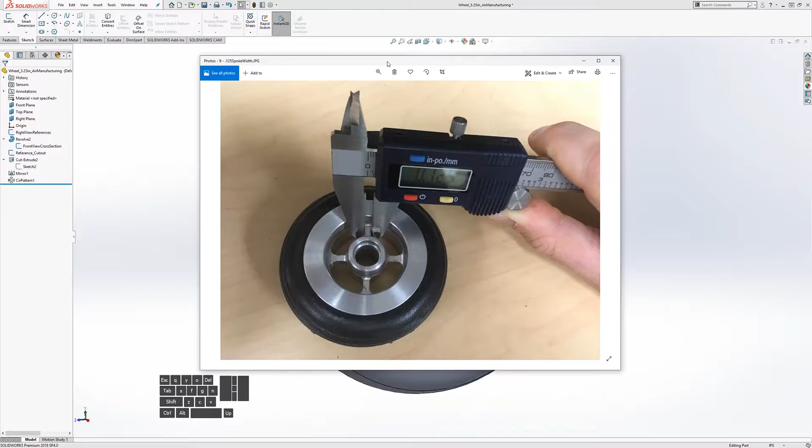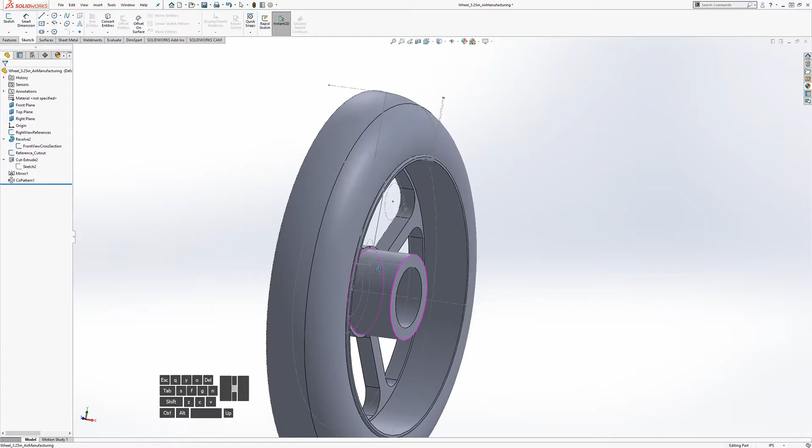So we can see that we are missing maybe some fillets. They're not there. We did this fillet in the sketch because it actually locates some of where our tire ends.

So we did that in the sketch, but the other fillets we can do as features, which is pretty clean. There's definitely one on the outside of the hub, as well as the inside, and they're probably actually chamfers. When a corner of a cross section is a male corner, it's usually chamfered, and the female ones are usually filleted. Like this one is probably filleted, this one's probably chamfered.

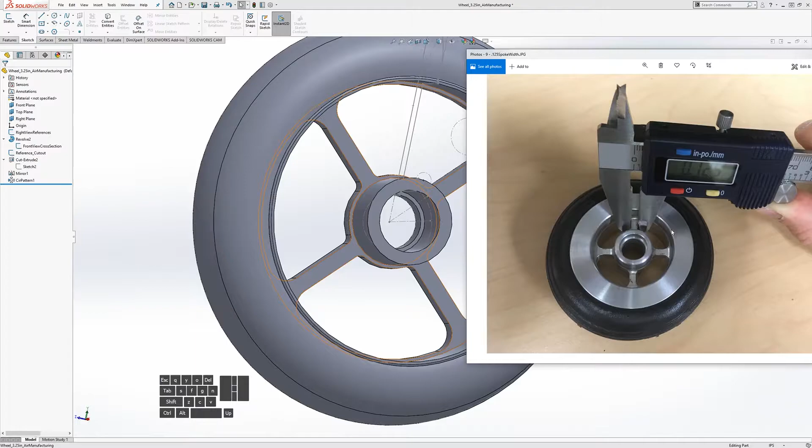So let's go ahead and do that. This guy is a male corner, so we're going to go into the features, and we can chamfer that edge. That is way too big.

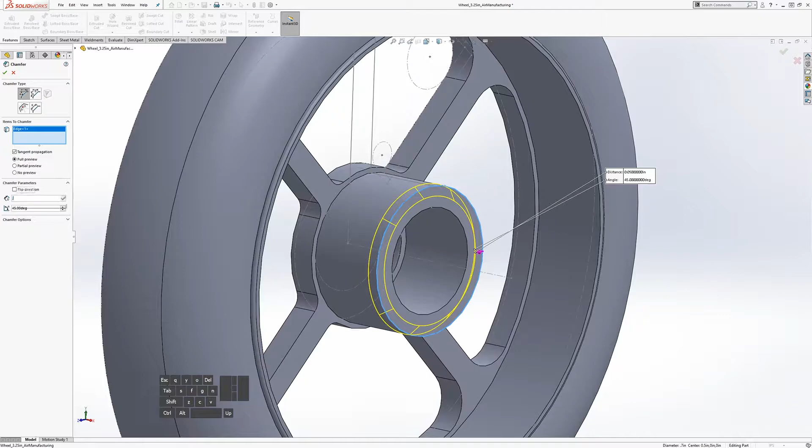That is way too big. Let's try 0.05 inches. That looks a little big too. In our preview, maybe 0.025. That looks good.

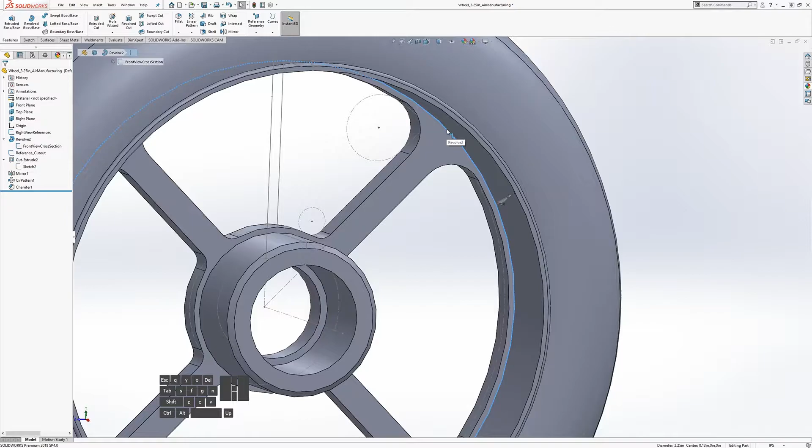And so if we go back and do this now, so a machinist can go in here with a round-ended mill bit and just going around in a circle, and that will end up filleting this with an actual circular fillet. Instead of here, a round bit can't accomplish a male fillet. So often the male ones are chamfered.

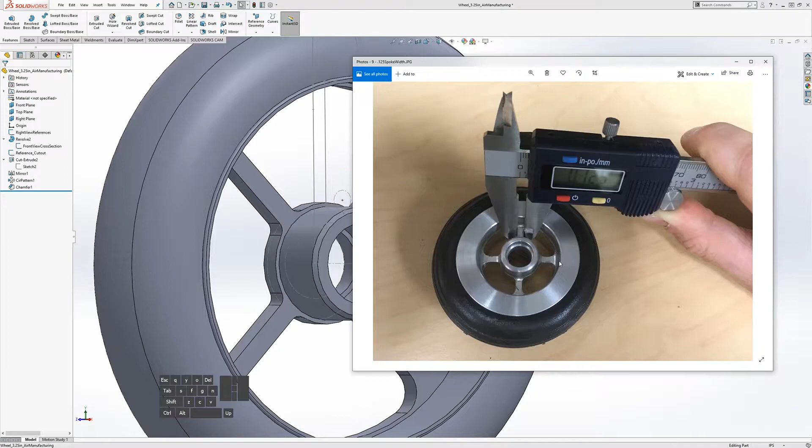So, but yeah, if we go back and look at our part here, it definitely is filleted a bit in there. So let's go ahead and fillet this guy, and that is going to be big.

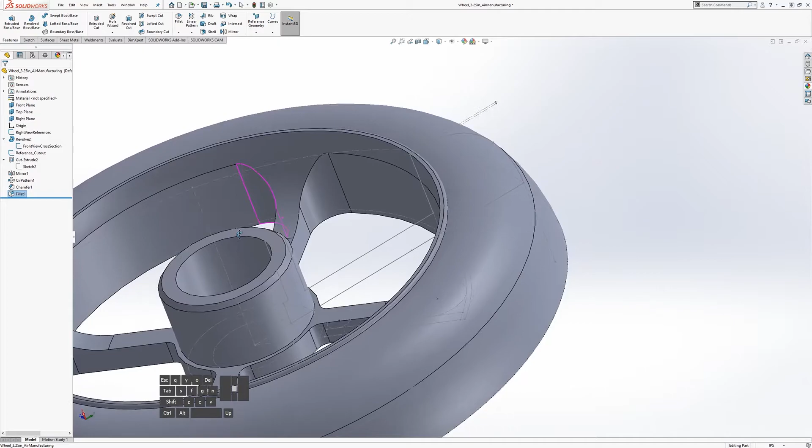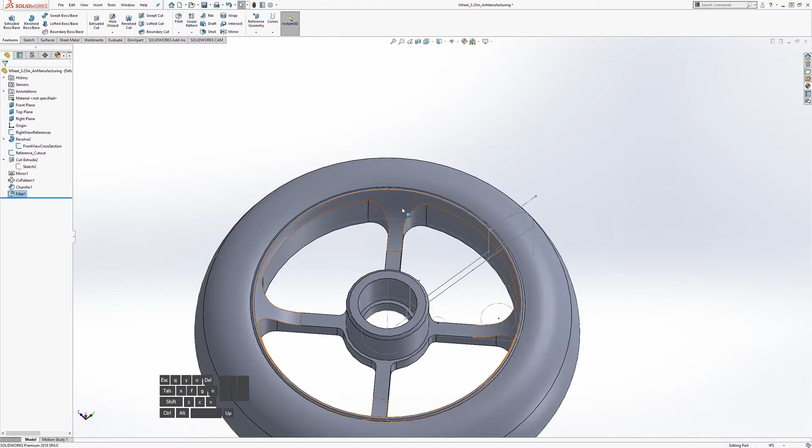So you can see if we go with that, that is a manufacturable layout here, because the operation could be with a round-nosed mill bit to go around this circle and create that fillet, and then come in with a bit that can do a through cut and go all the way through, and a circular bit obviously would do these cutouts, and you would still have this fillet at the end, but it's not that big, so we can go and edit that feature.

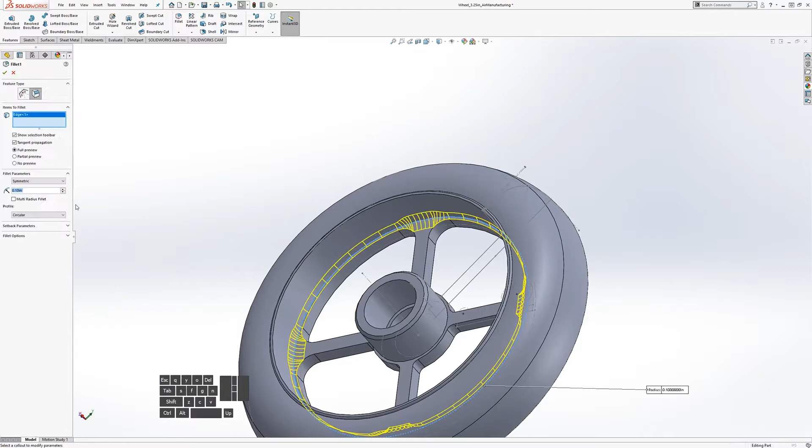Let's try 0.1 inches. Not sure. Let's check out a picture again. Probably smaller than that. So 0.05 inches. And that looks pretty good. So definitely that one.

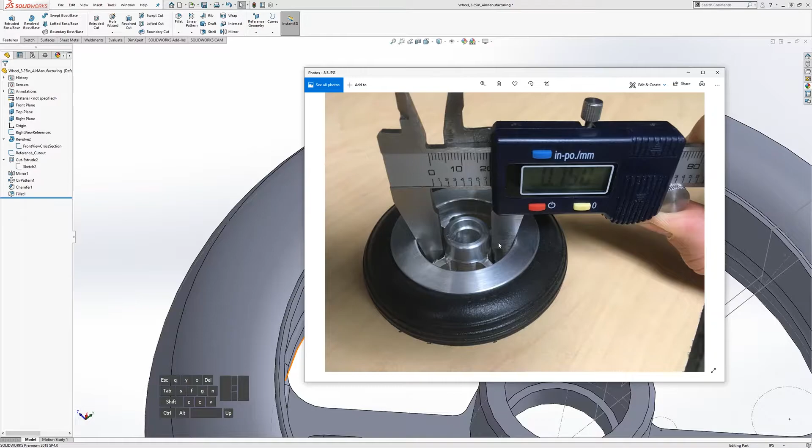What about the inside here? That's a male one. It's probably chamfered. Go back in here. Yeah, I would do a chamfer there.

So let's just remember how big this is. We can link all these, but there's only 2 of them, so I'll just remember it's 0.025.

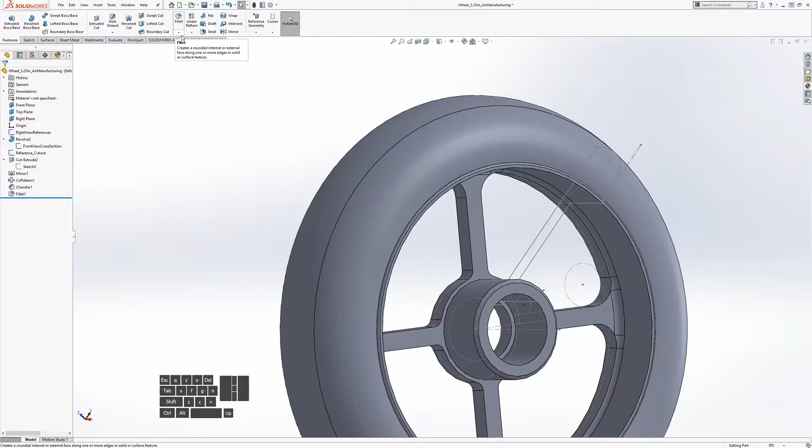Let's go into our chamfer here. See what that does. Does that look right? Kind of a bit aggressive.

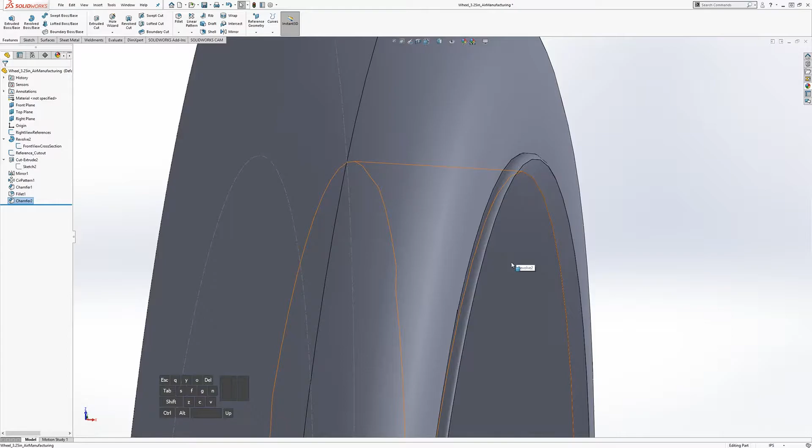It cuts into the bead of the tire, sort of. That one. Oh yeah, that's not the one I should be chamfering. It's the inner one, so I can actually change the edge here.

Oh, and yeah, I'm missing the... Okay, I cut too far. I made the cutout too far here. I'm missing the actual wall of the rim here.

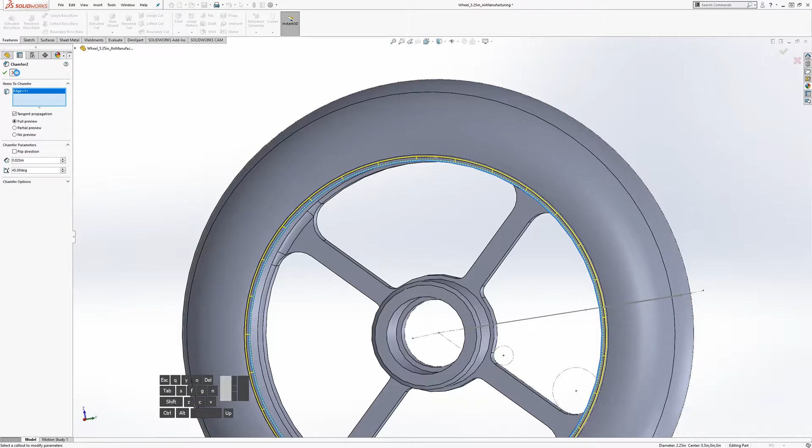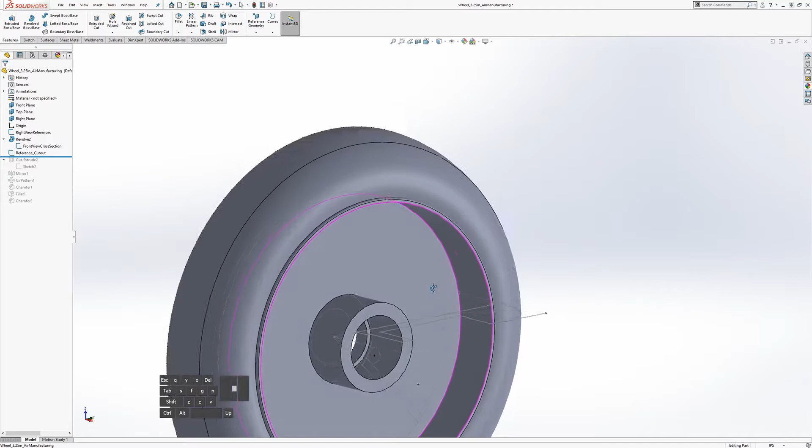So let's go back to our reference cutout here. That cut too much. If I roll the part back to this point, now I can see that actually I'm missing the wall of the rim here.

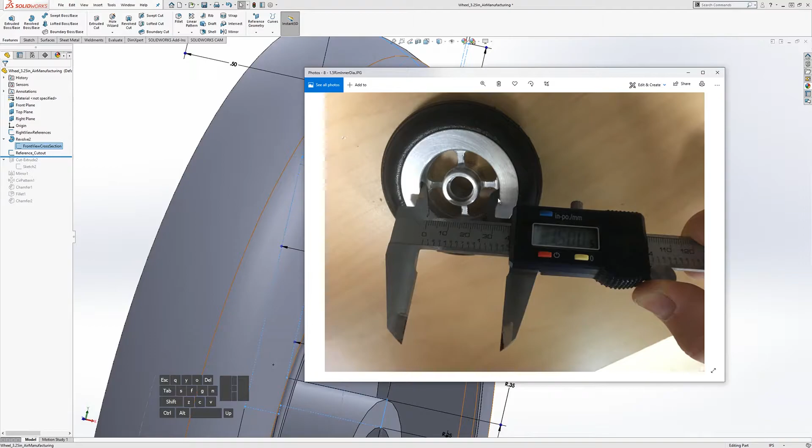So let's go see what we did here. So we're missing, so 1.5 inches. That is the inner radius of, well, inner diameter of the rim. So let's roll it back one more.

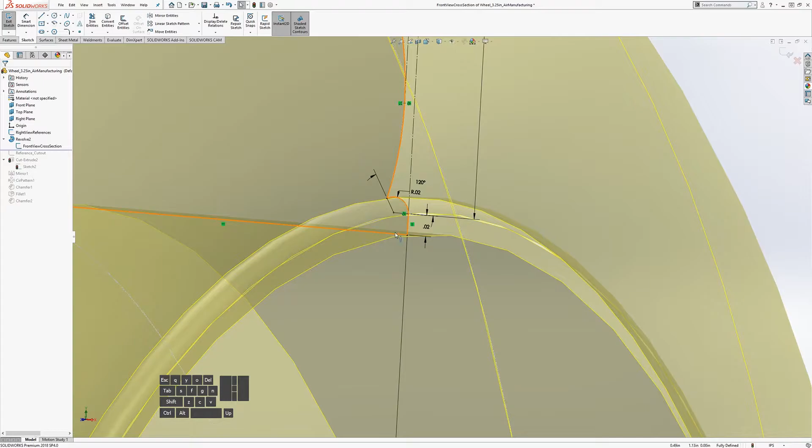Get into this sketch. So we need this to continue until, so we actually need this. Yeah, let's delete this guy. No.

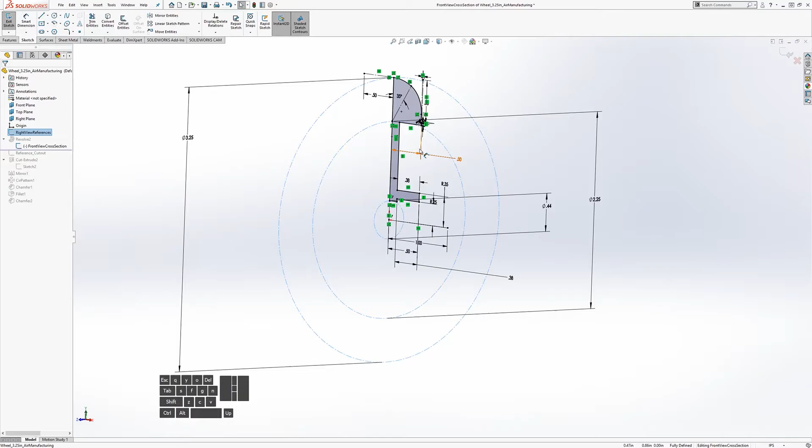That is, let's go back and remember what this is. 2.25, oh yes, that's the outer diameter of the rim. So we need an inner diameter of the rim also. It's at 1.5 inches. So we need to edit this.

This here is going to be the outer reference. So let's just turn that into construction. This into construction.

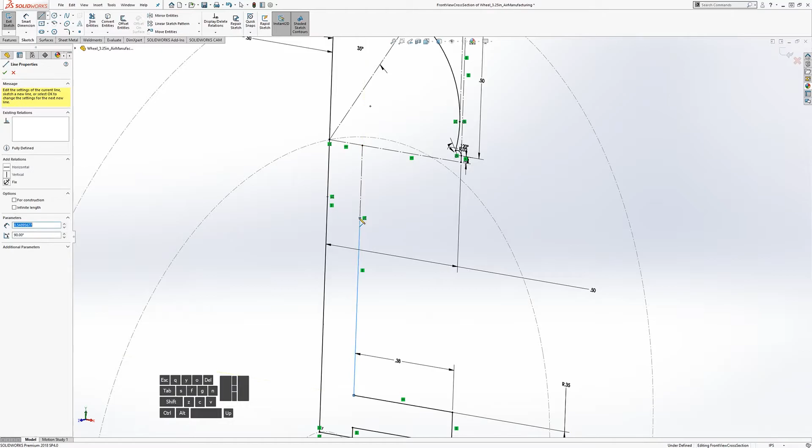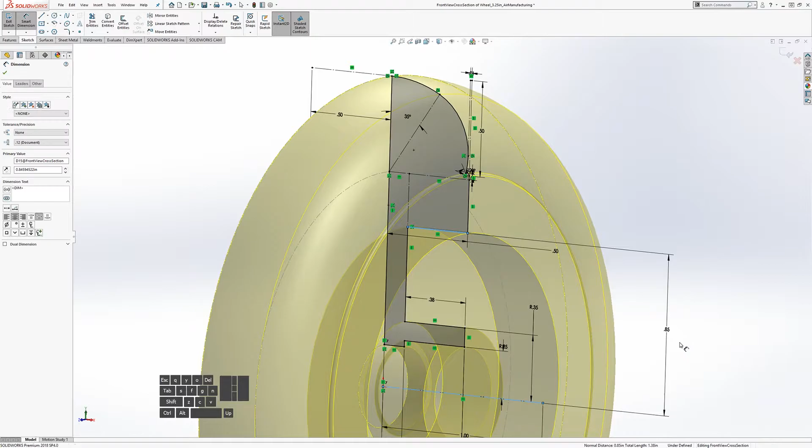So I probably wouldn't have cut it exactly that way, but looking back, to fix it that looks better. So we can now get this guy 1.5 over 2 inches. And that looks more like it.

Now we actually have a wall of the rim there. Don't know how I missed that before. But that's good. So that's pretty common in CADing, that we're looking at the details and not the big picture. It's a good idea to check the big picture out once in a while too.

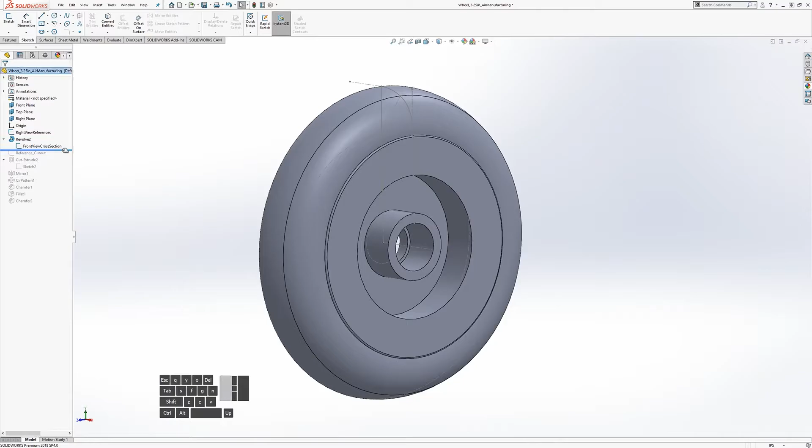This is also common here, that we need to go back and recreate some features here when they're probably going to break. So we want this to not be tangent to the rim here.

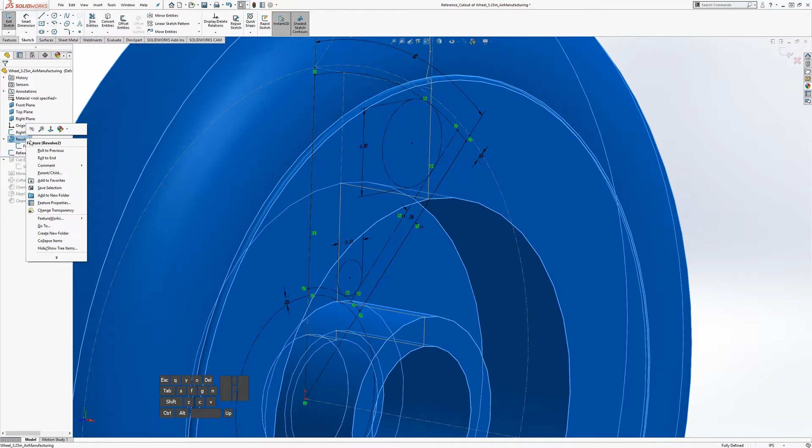Let's hide again the revolve. We want this cut to come down and be 0.025 from this one. So which of these? This one. Okay, I see it now.

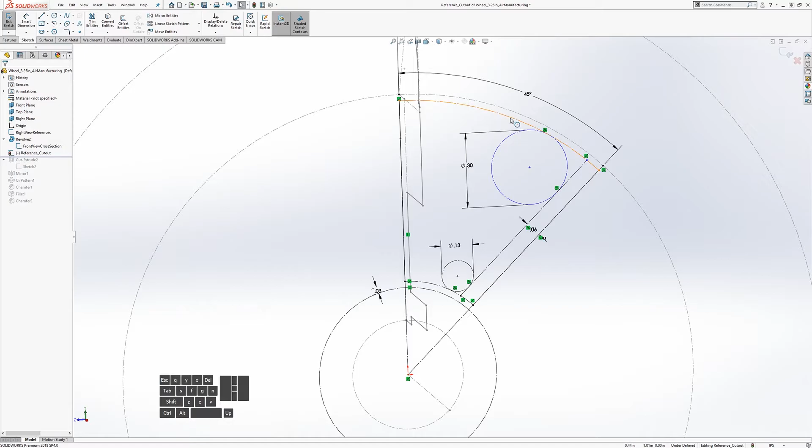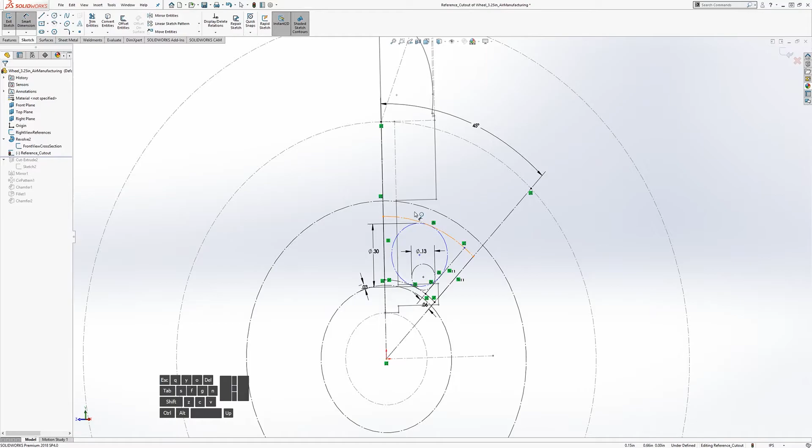So yeah, we can get rid of this. And instead, we want to be looking at, so we need a new reference in here. Let's go to here, construction, and we're going to take that measurement in here. This is 0.05 over 2 inches.

There we go. So now we have a better reference for our cutout, and these radii are probably a bigger estimate. If we go look back, they're not that big in that cutout.

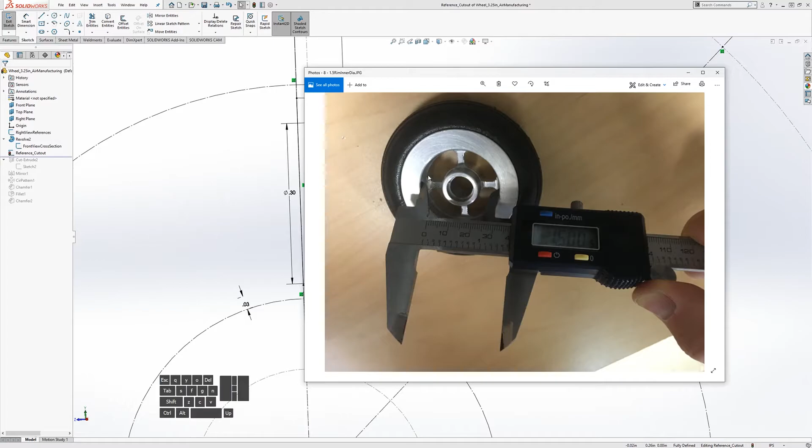So let's actually compare with a similar view here. Head on, I'll put it on this side of my screen, get this guy out, and yeah, they don't take up as much of the spoke. The spoke is straight for about half its length, maybe a third of its length is straight.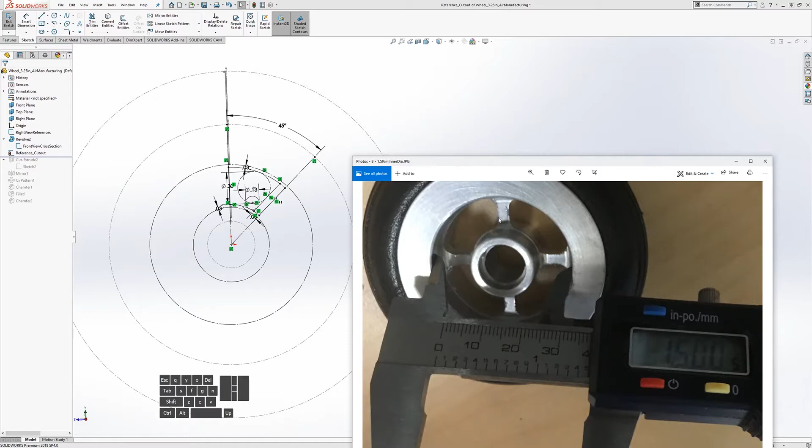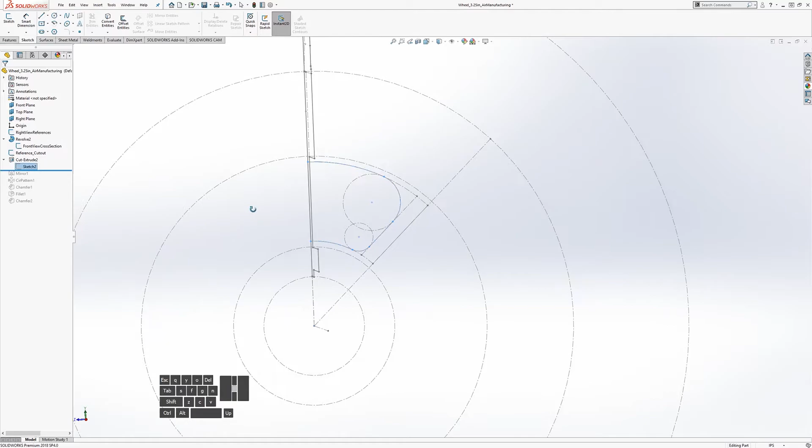So let's just make this a bit smaller, maybe a bit bigger than that. This one, well, let's try how that looks. So that cut extrude resolved well again. It updated with it.

Because all those references were referring to lines that when we just moved where they are. We didn't delete any or change their layout or anything.

So may as well call this cutout sketch.

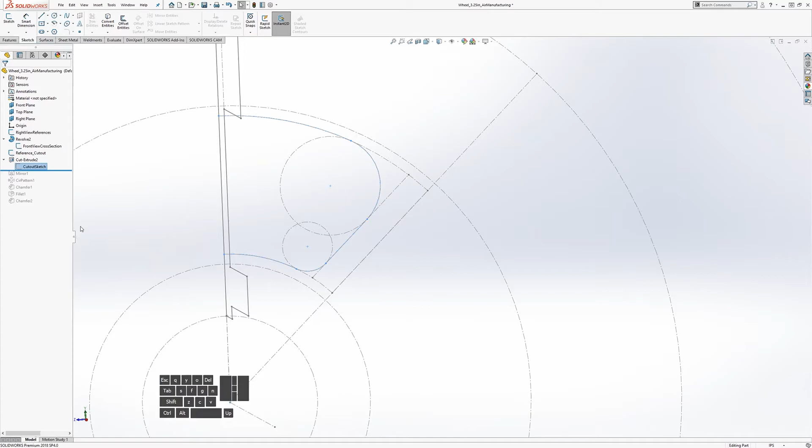And we should just view this now so we can see its progression. All right, so now we can go back down. Mirror looks good. Pattern looks good. And what about these guys now? Chamfer looks good.

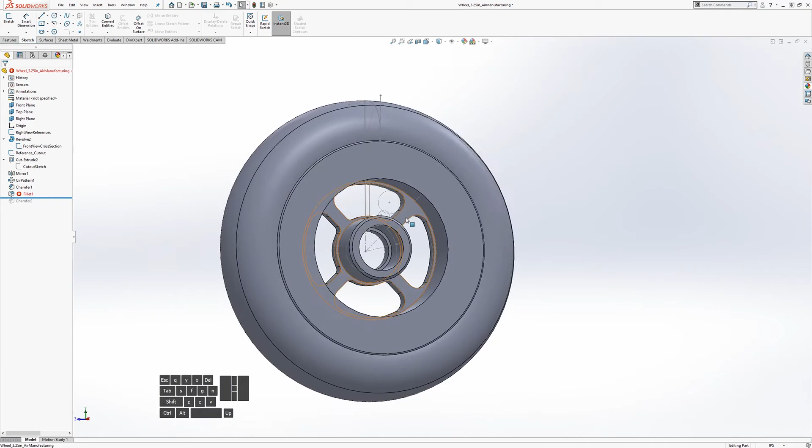Fillet broke. And that's because we did change where it used to be. It's on a new geometry here that did not exist before. So if we edit that, it's looking for a missing edge, which it's showing you where it used to be.

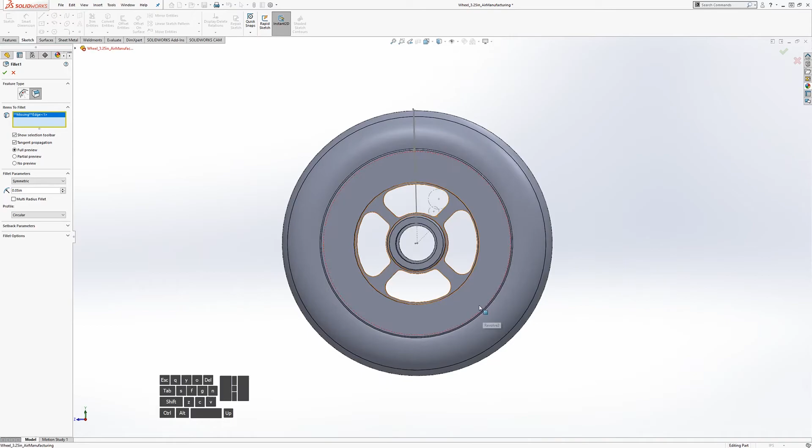It used to be there. This red line that we can no longer grab anything there. And it knew that it was on an edge that no longer exists. This face is now added. This edge is new. It wasn't there before.

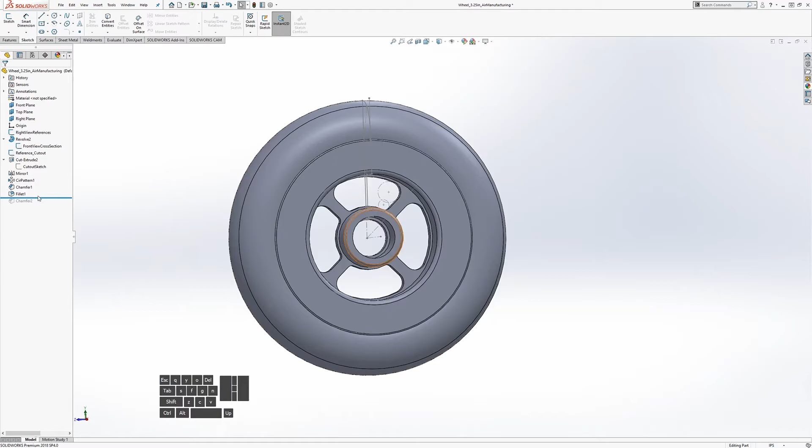So we can just select the old one, change it to the new one, and say OK, and then there it is. Let's just continue this tree. That chamfer broke. That was, where was that?

That was also there. Okay, so we actually need, I put it on the wrong one here. Let's rewind it a little bit.

The fillet was not there, or it was not intended to be there. It was intended to be here. Let's get rid of this. That's where the fillet is. Go back down.

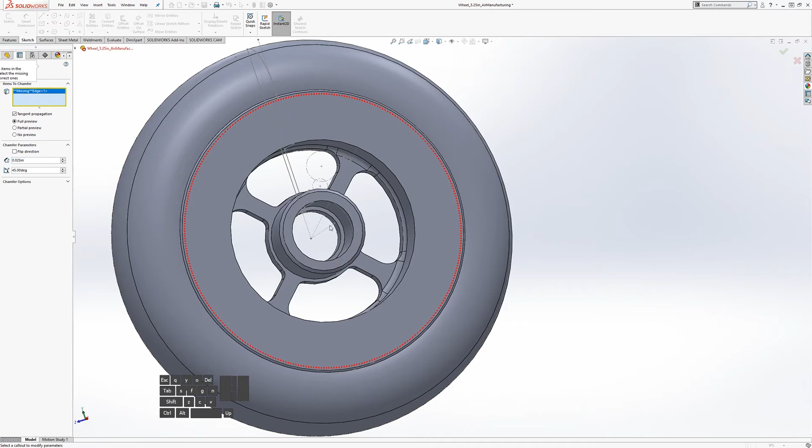Chamfer is intended to be here. They're actually, yeah, they're on the same radius, but one's in on the female side, one's in on the male side out here. And that is the one that should be chamfered. So that's good.

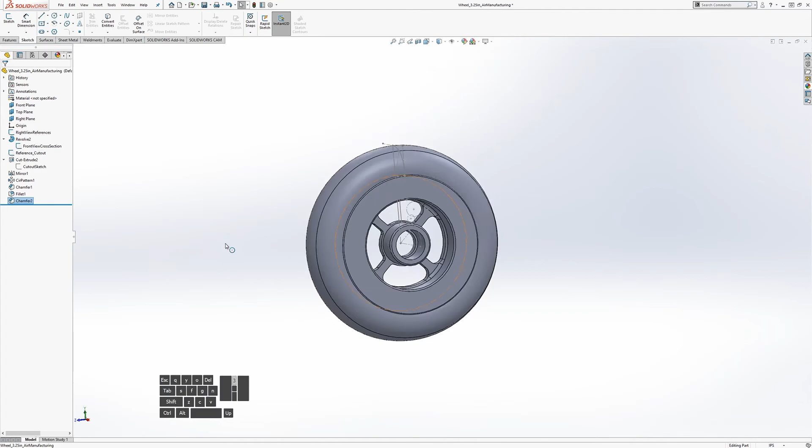So yeah, let's take a look at, let's put it over here. Take a look at the wheel. And I'll put it on this side. It looks pretty good.

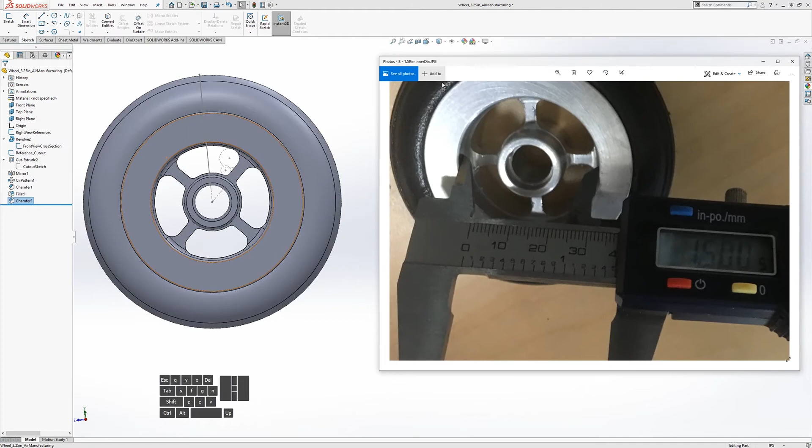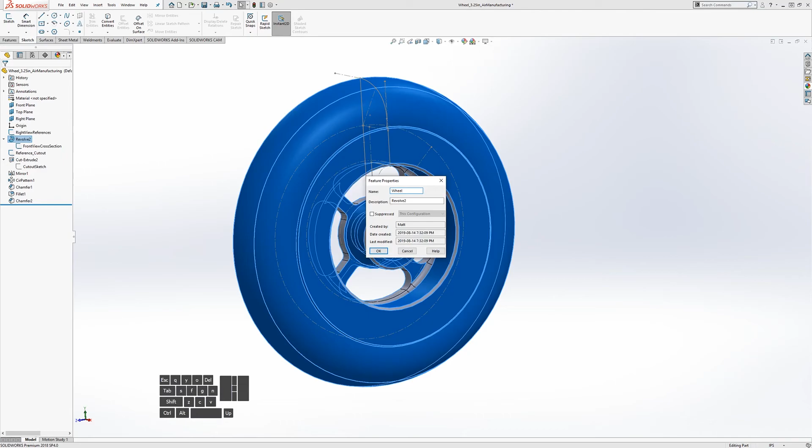We have most of the features in there. Let's do the final mirror to take a look at what it's gonna look like. So we could rename these two to make it more descriptive. So this is the wheel revolve wheel.

This is the cutout. Call this the rim. This is the mirror cutout. We could put that it's which plane it's going on, just to make it quicker.

So it's mirror front cutout. Circular pattern cutout. And I mean, we can call these, so this is hub chamfer, this is...